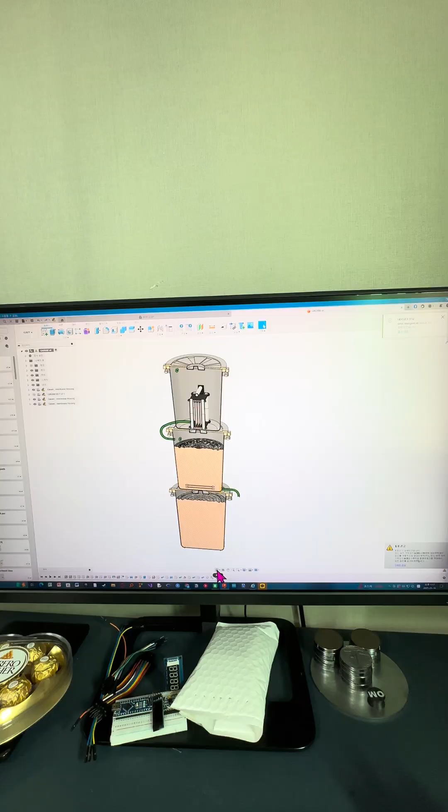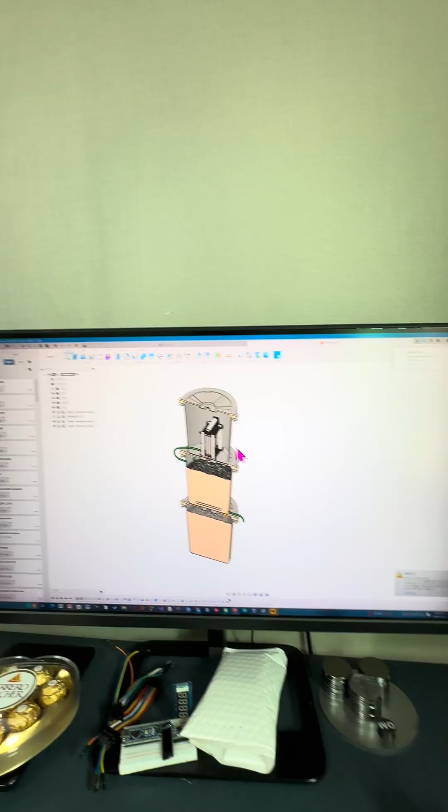This project log isn't one where I go hands-on. It's more of a project log where I explain what flaws our initial purifier had and how this new design works. Okay, so let's start. Our initial purifier had two stages, and now this is the modified CAD design. I sort of lost the initial one, but this upper part remains largely unchanged.

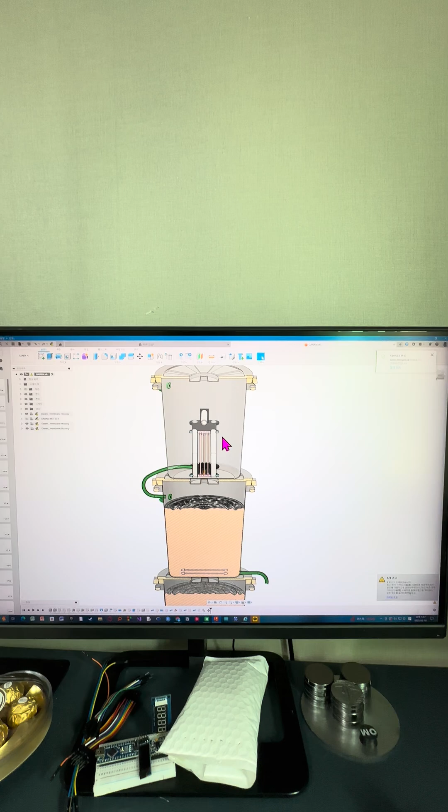This is the ceramic membrane filter with a 0.1 micrometer pore size. It's able to remove most bacteria, actually all bacteria larger than 0.1 micrometers, and that includes E. coli, among other things that can cause several diseases.

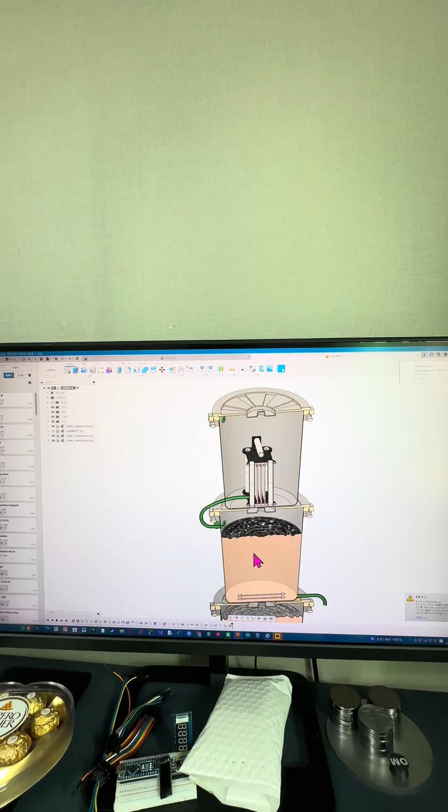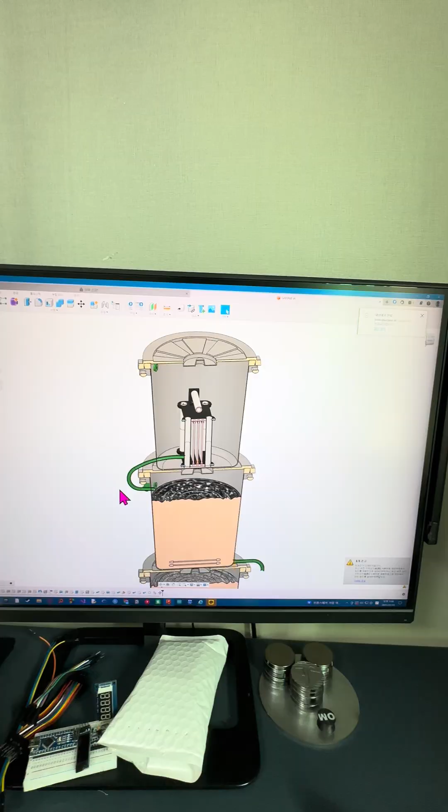So that was our initial design, and then down here, instead of going to this second chamber, our initial design just put a small, not ceramic, but activated carbon chamber filled with activated carbon. In hindsight, that would have never worked, but at the time we thought that much exposure to activated carbon would allow for the removal of heavy metals like arsenic, zinc, and copper.

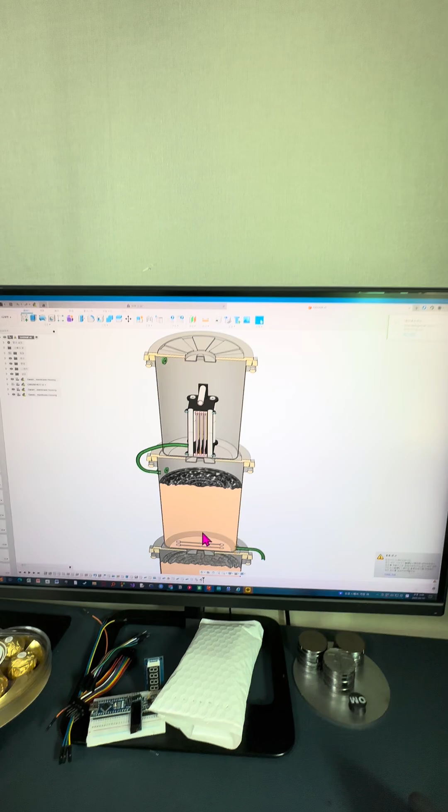Now, this new design - well, before I explain the new design, the problem with the old one was kind of simple. It had three big problems.

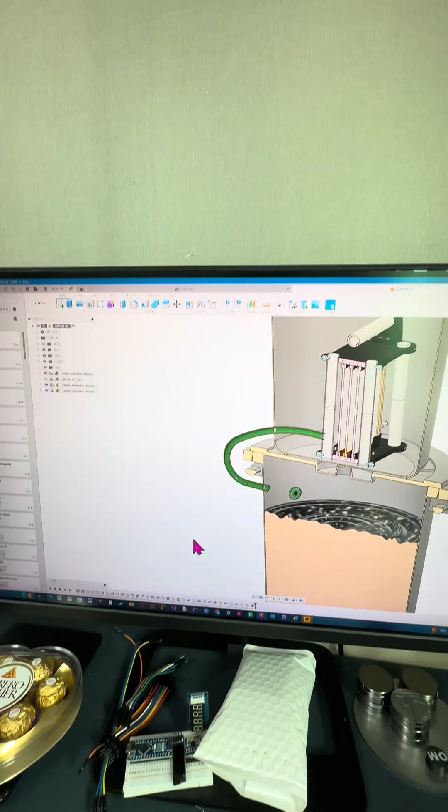Firstly, we checked, and it was not able to remove the heavy metals because when you just put a small chamber here like this, water will just flow through the activated carbon chamber incredibly quickly. By incredibly quickly, I mean like a 10-second exposure time maximum. That really doesn't allow for the activated carbon to remove all the heavy metal particles, and so it was largely ineffective.

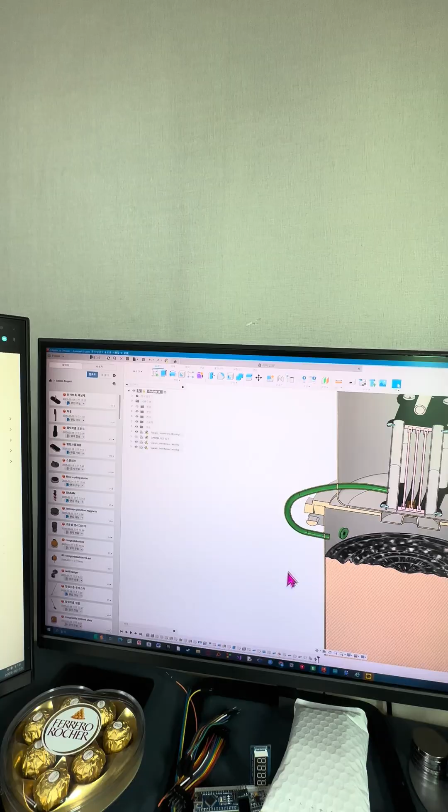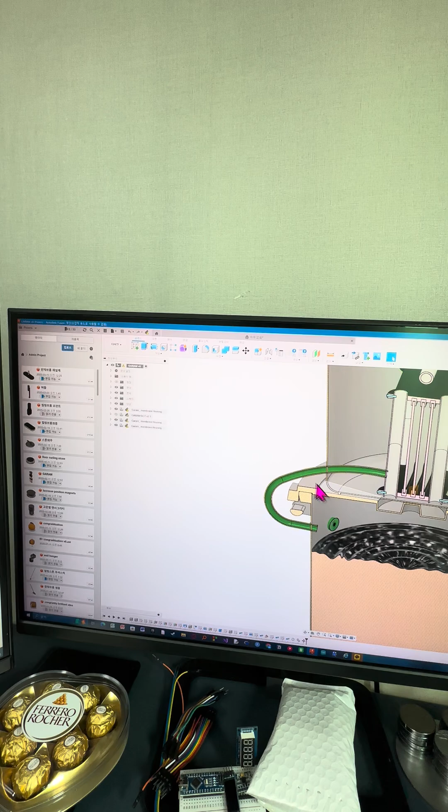The second problem was that this activated carbon chamber had still water inside. Even though this membrane kept flowing, sometimes when you're not trying to drink water, we had a valve here, and you would close the valve, but the water would still be stored in the activated carbon chamber because there's no force pushing the water down.

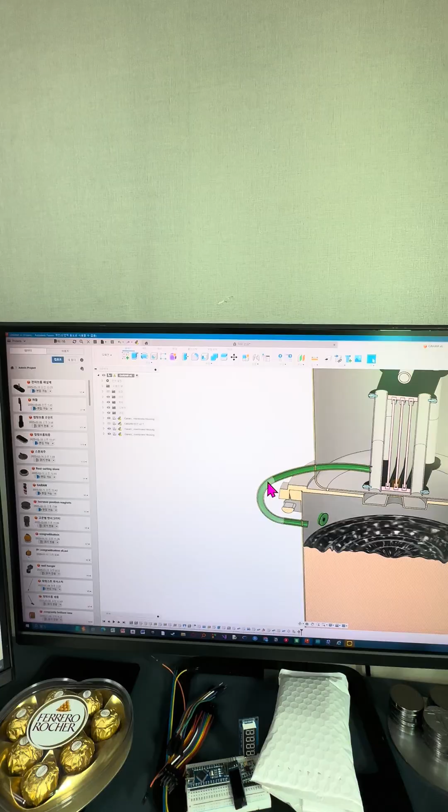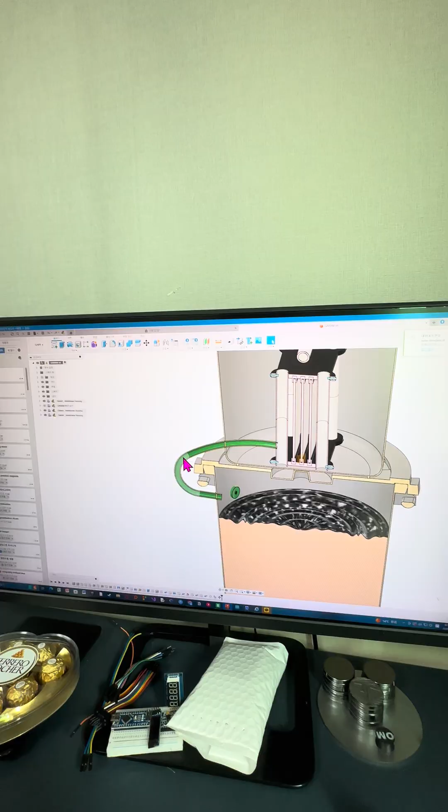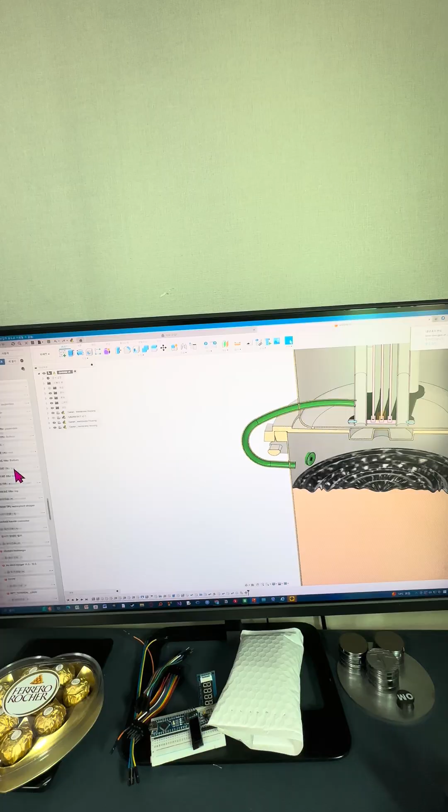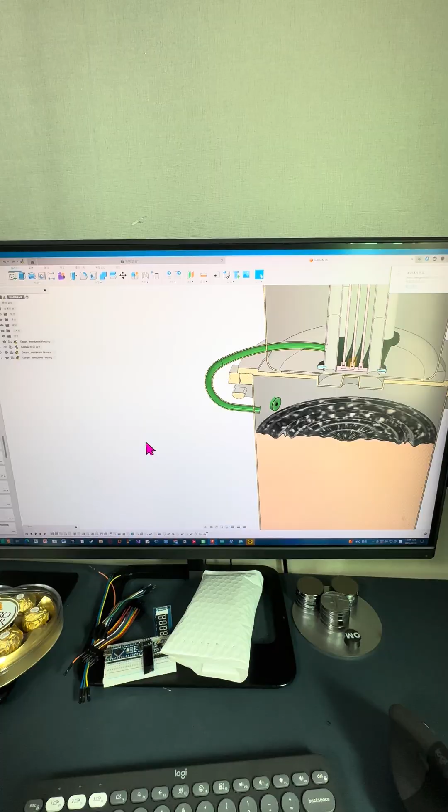So that was the second problem. Now, the third problem was this. The activated carbon chamber - I have the CAD design somewhere down here. There we go. Actually, I have it in three parts, and I'm just too lazy to show it to you. But basically, it needed screws to bolt it down and keep it in place. And then you also needed hexagonal-headed drivers in order to remove the lid and replace the activated carbon. That's obviously not ideal when you're installing a purifier sometimes in the middle of nowhere without those sufficient tools.

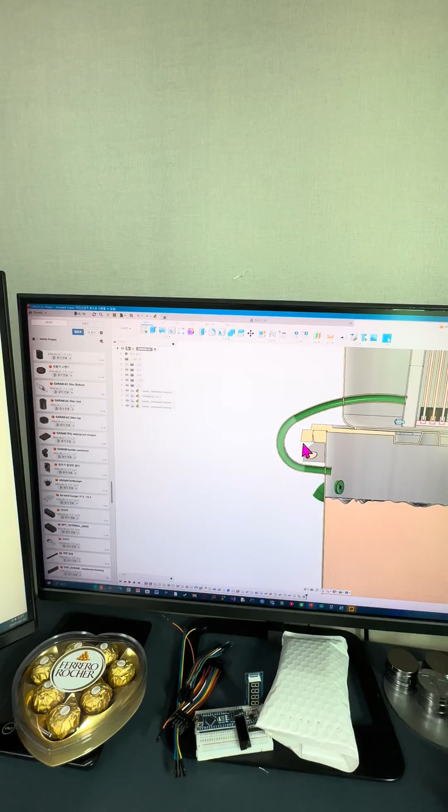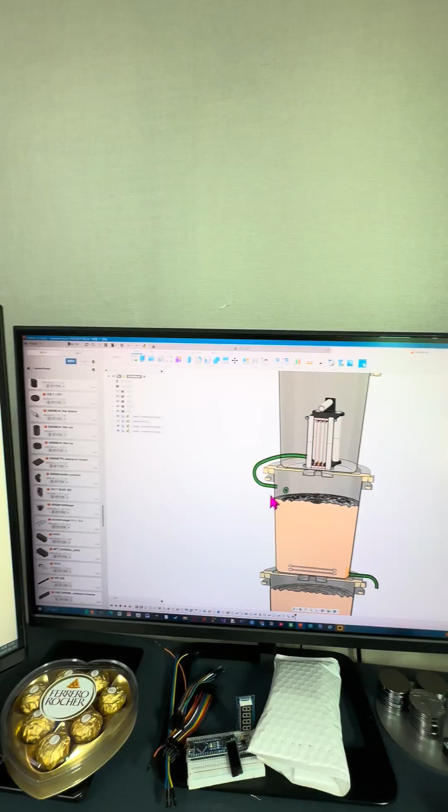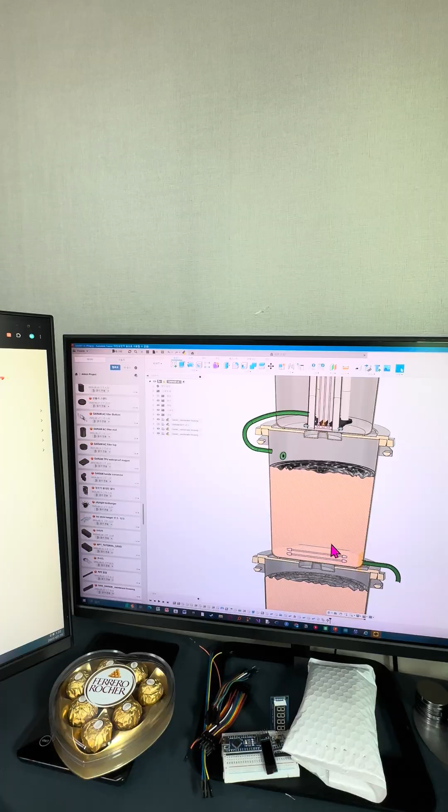So I changed that. Now I'm going to tell you how we addressed all three problems and fixed those problems in our modified design. Firstly, the problem with exposure time: we redesigned the entire activated carbon chamber. So instead of a little chamber to the side here, we now have a dedicated plastic bucket, about a 105-liter capacity bucket, that houses about 20 kilograms of activated carbon and 2 ceramic membrane filters in parallel. I'll explain why this works.

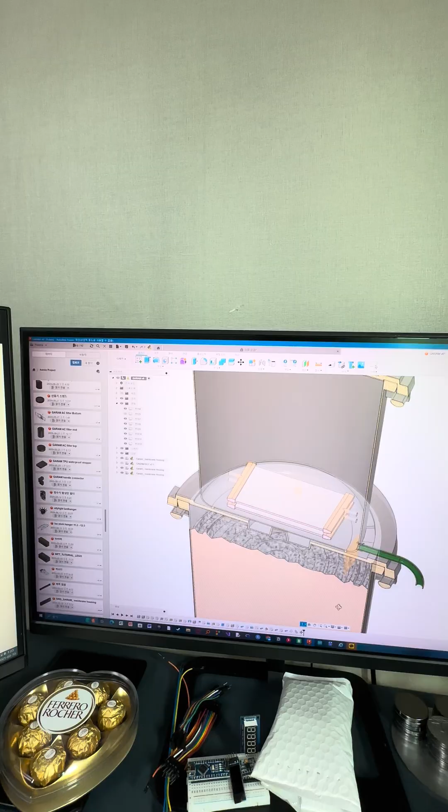Firstly, if the water wants to exit this activated carbon chamber, it needs to go past - can I remove this so you guys can see - yeah, it needs to go past these ceramic membranes. Now, if you know anything about ceramic membranes, you know that they require a lot of gravity-driven pressure in order to push water out.

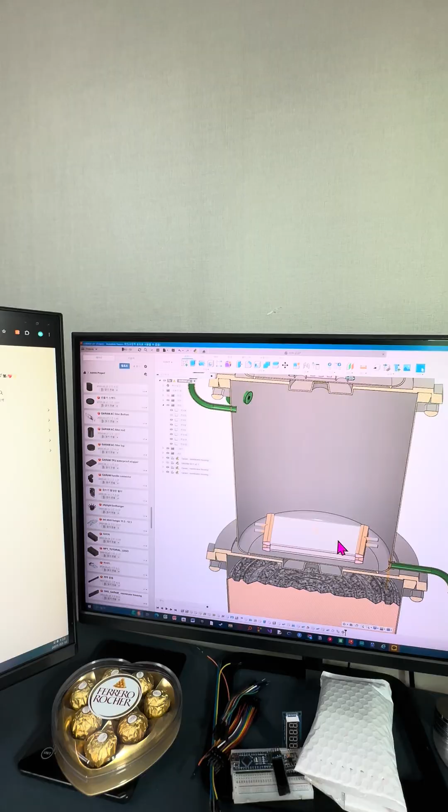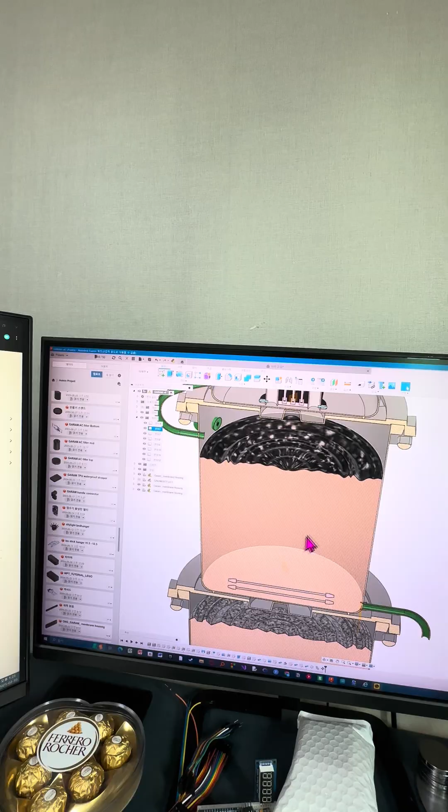And what that enables us to do, and you also know that it's relatively slow compared to just tap water, and that's because it needs to push water out of its small pores. Normally that's a big downside because it makes the whole process a lot slower, but in this case, where we actually need to increase exposure time, it works in our favor because it allows us to increase the exposure time drastically.

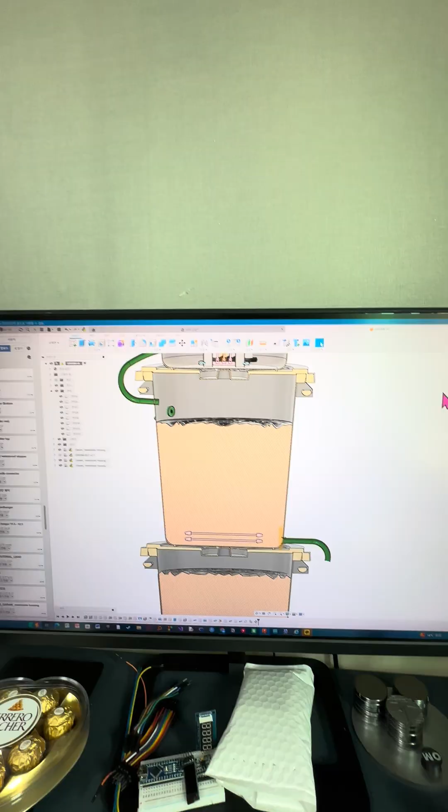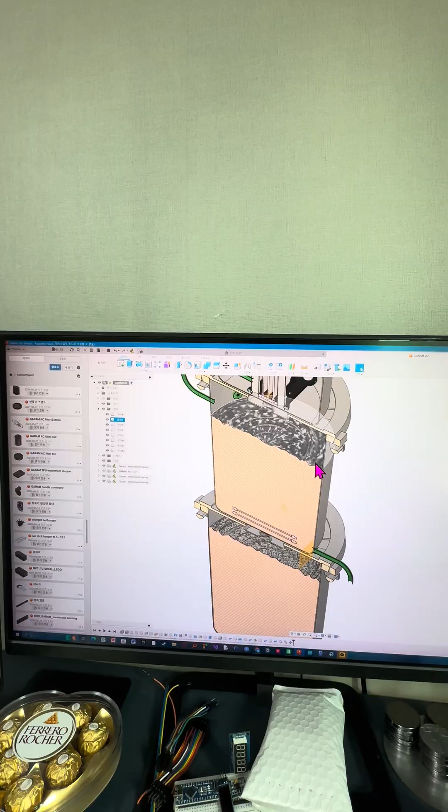We've measured that when you fill this entire tub full of water, about 100 liters when it's filled to the brim, it takes a couple hours for the water to exit. I think that's much more than enough exposure time for the water with the activated carbon. I believe, though we haven't tested it yet, that it will be able to remove those heavy metal particles that we were worried about.

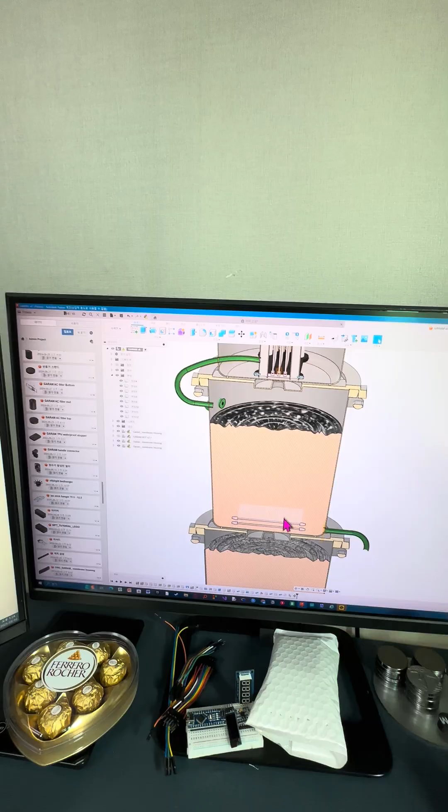So that's problem one solved. Problem two was the bacteria problem, and we also addressed that with this ceramic membrane filter. Any bacteria that can grow in this condition will not be able to permeate through these ceramic membrane filters, because these filters are the exact same that are used up here, as in they are 0.1 micrometer pore size membrane filters, so they're able to block the progression of the bacteria.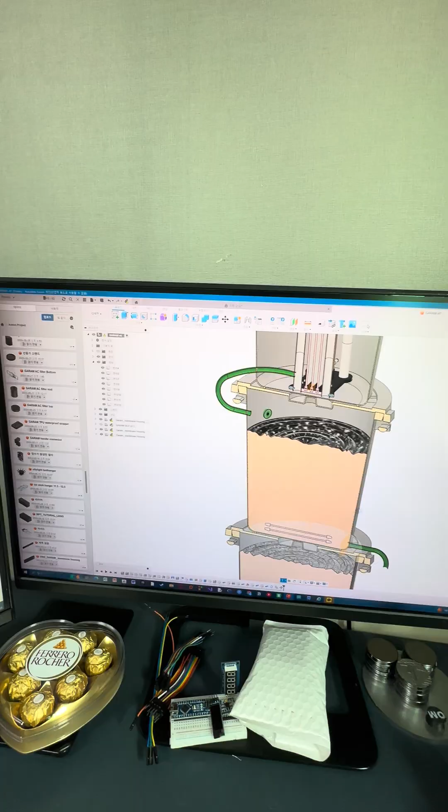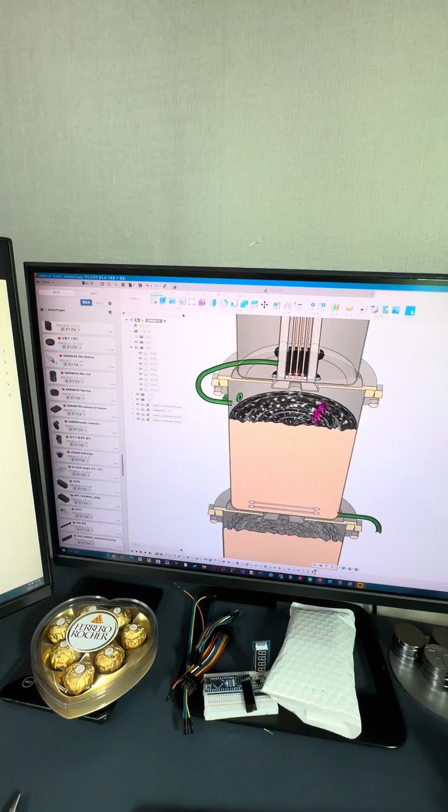Now the third problem was activated carbon removal, or activated carbon refills. The refill process was too complicated, so we fixed that by just making this chamber a plastic bucket. You just pop the lid, and then you dig all of this activated carbon out, and then you replace it with new activated carbon. You don't even have to replace the entire thing.

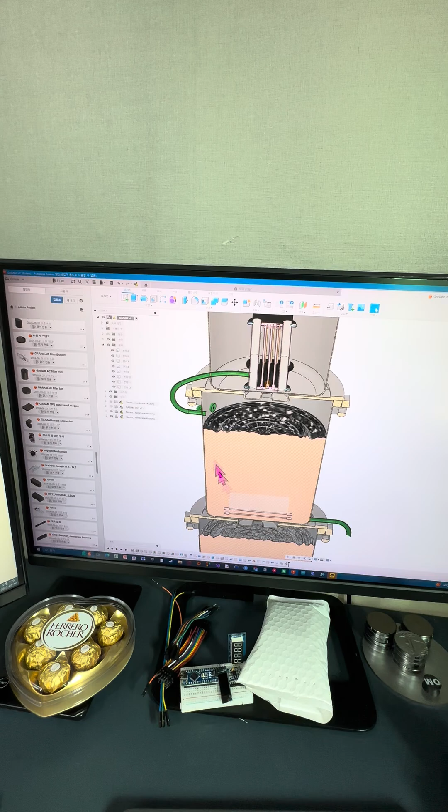It can be tricky to get down here and replace the activated carbon down here. Honestly, all you need to do is replace the bulk of this activated carbon, and we estimate that it will still be able to run and deliver the performance that we hope to get. So that's how we addressed all three problems.

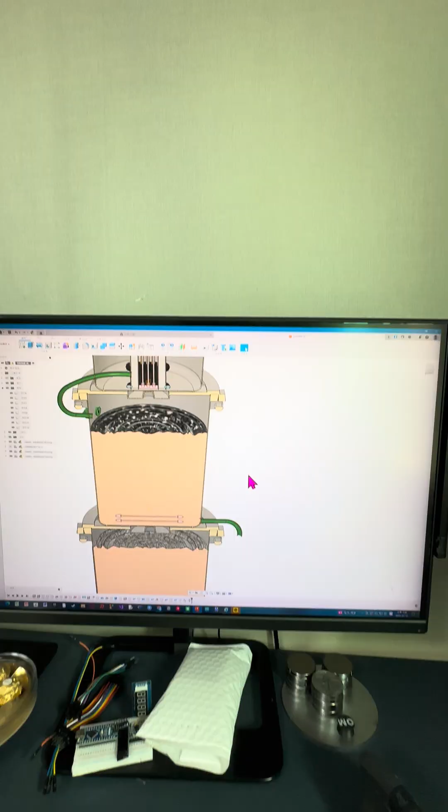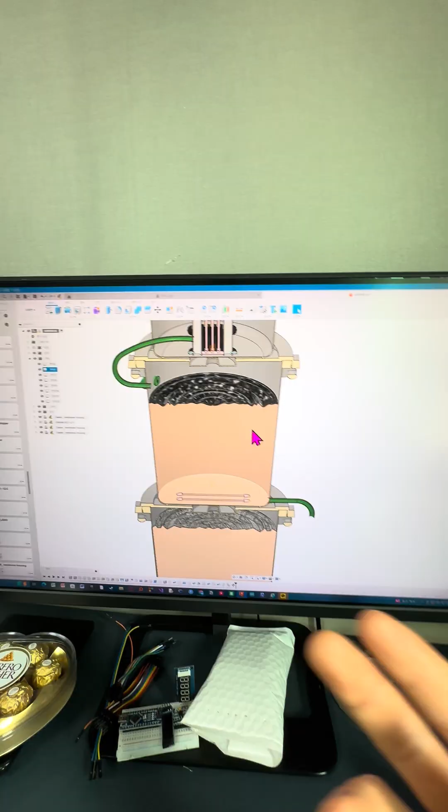Now there's actually a fourth problem that happened during testing when we came back to Korea, and that was the problem of activated carbon microparticles. If you don't know, charcoal really likes to break. It's really, really brittle, and every time you're doing a barbecue and you accidentally touch a coal, that black powder that comes off your hand is actually incredibly small particles of the charcoal itself. So it really likes to break.

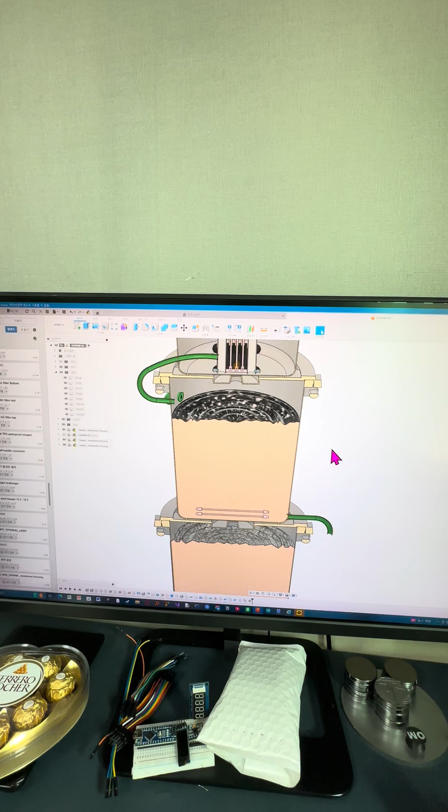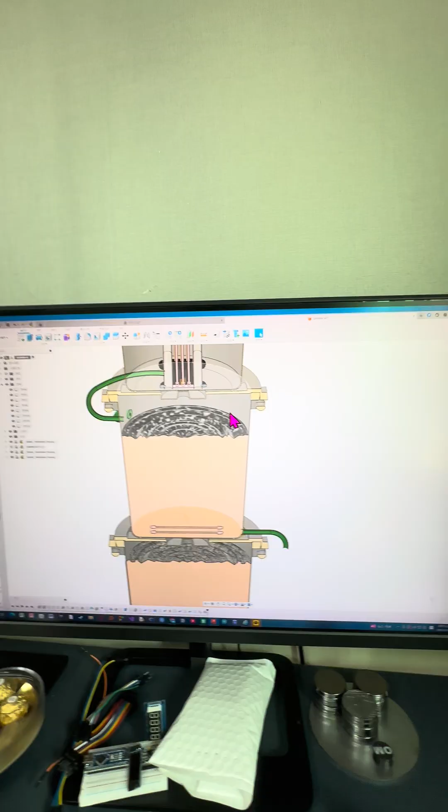It's very abrasive, and because of that, when you pour activated carbon in here, since activated carbon is essentially just charcoal but with a bit of post-processing, it still remains incredibly brittle and abrasive, which means it still breaks easily and generates a ton of powder. The problem with powder is that it's not always visible, and if it's not visible, it means it's incredibly small, somewhere in the ballpark of 1 nanometer to 10 nanometers. That is scarily small.

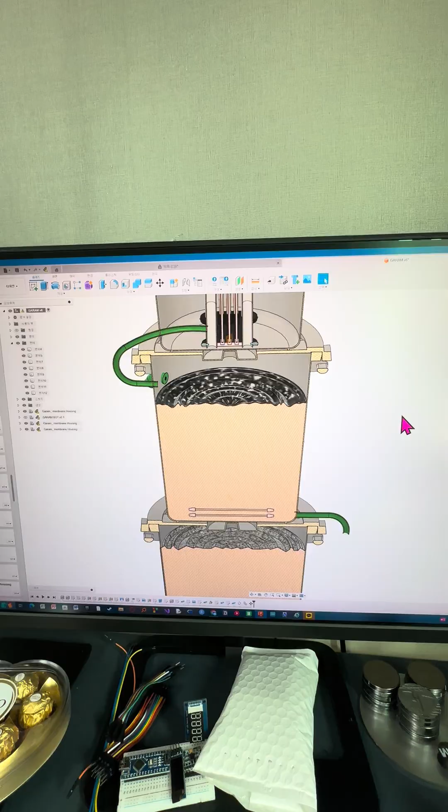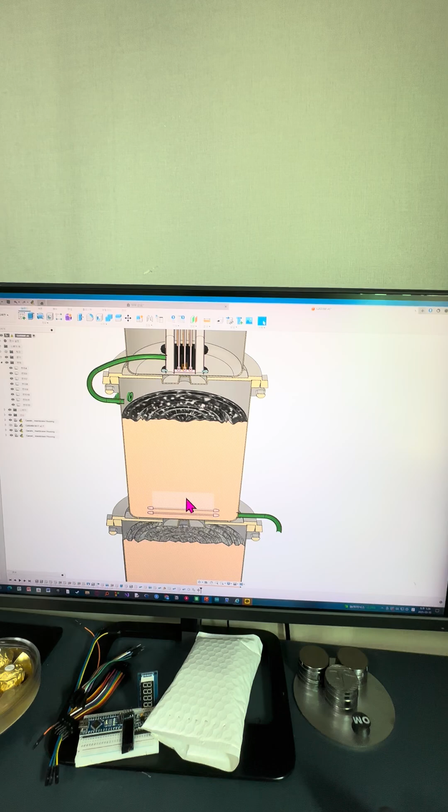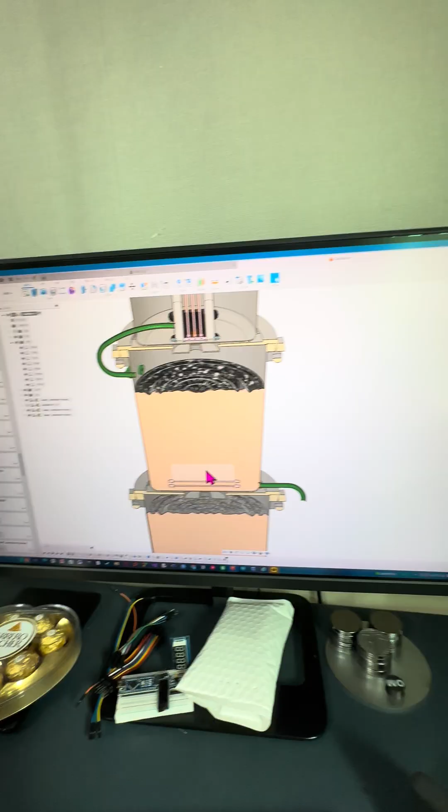And those are able to permeate through the ceramic membrane filter, and that was a big problem. Actually, the initial problem was that we didn't have this sort of permeation device here, so not only did the nanometer particles flow out, but visible micro or millimeter particles were also able to exit and get into the end product. That's terrible, you don't want to drink water that visibly has debris in it. So that was a terrible problem, and we remediated it by placing these ceramic membrane filters here, which are able to effectively block out any particle above 0.1 micrometer in pore size.

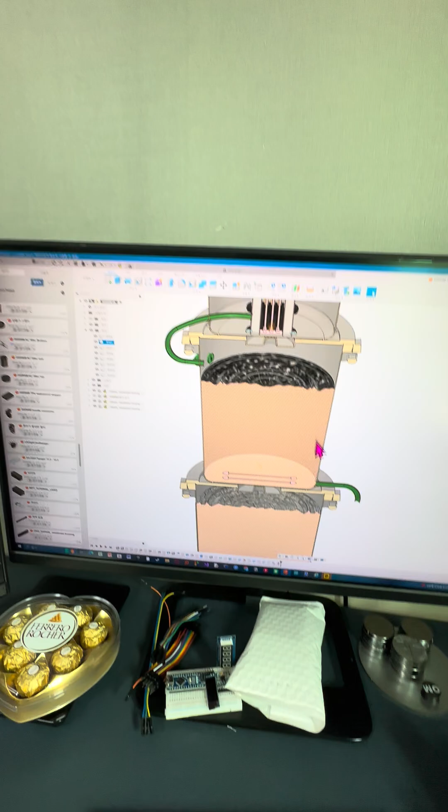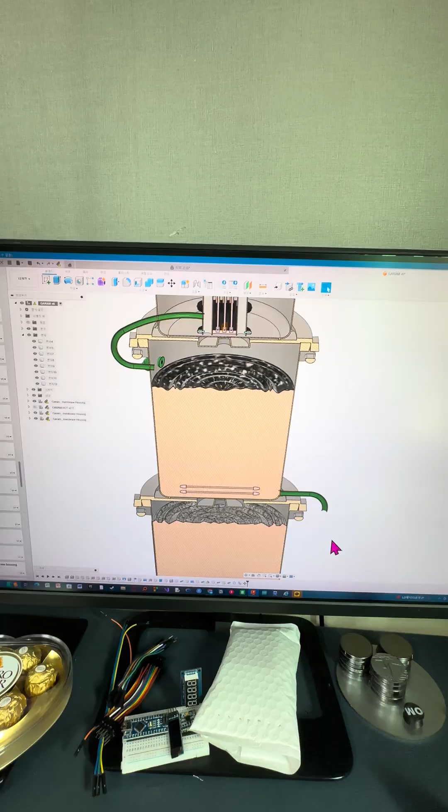We did testing again somewhere in the vicinity of February, in the second week, and did a couple of tests. The problem was that the super small nanometer powder particles of the activated carbon were still able to permeate through. The end product water was still grayish. We couldn't see any particles, but when we held it up to the light and checked it with a spectrometer, we found it was still not 100% clear water.

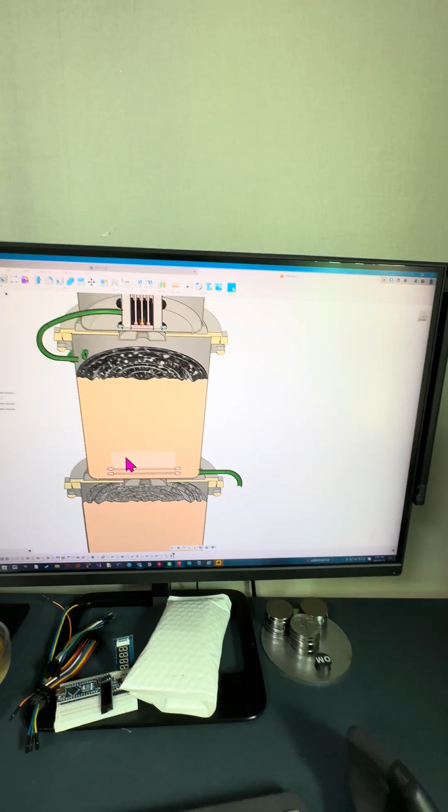That had me worried, because if we're not able to remove activated carbon particles with something as sophisticated as a ceramic membrane, that is very worrisome, especially because the other solutions for particle removal are very limited and also very costly. So I was worried a bit.

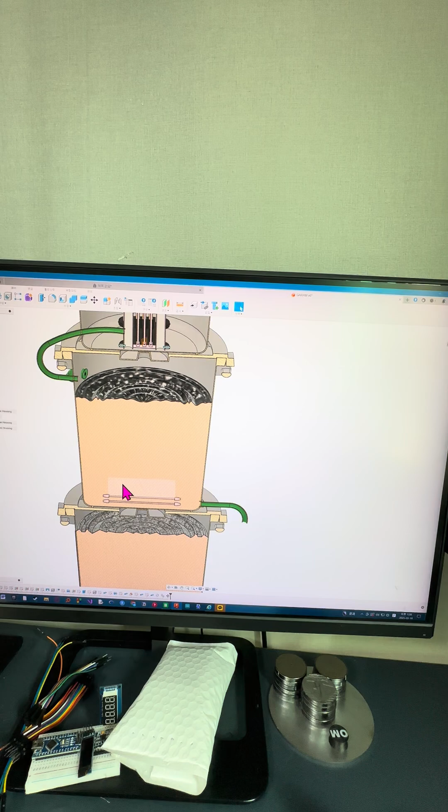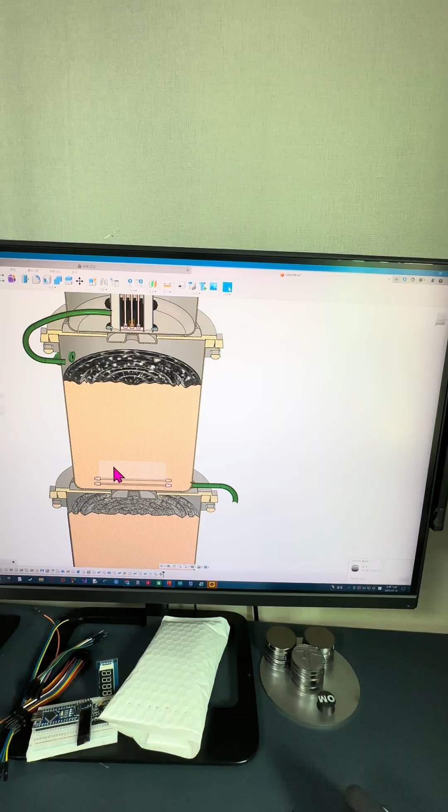Then I had this other event, sort of a forum by our club, though it wasn't even really a forum. It was just a presentation for our parents to see what we did this year on our expedition to Laos. One of my friends made a high quality documentary style video about our expedition last year, and in that video, it was actually me speaking, past me, somewhere in August.

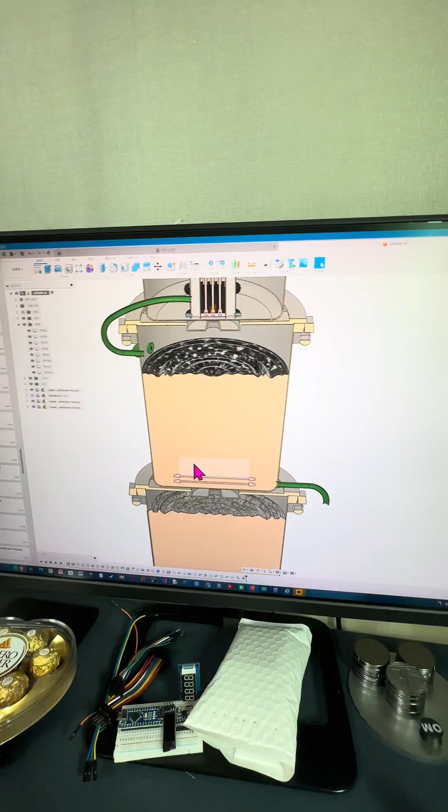In the video, he mentions that you have to leave the filter flowing for a couple of hours to let all the particles out. That just sort of hit me. I was like, right, he's right.

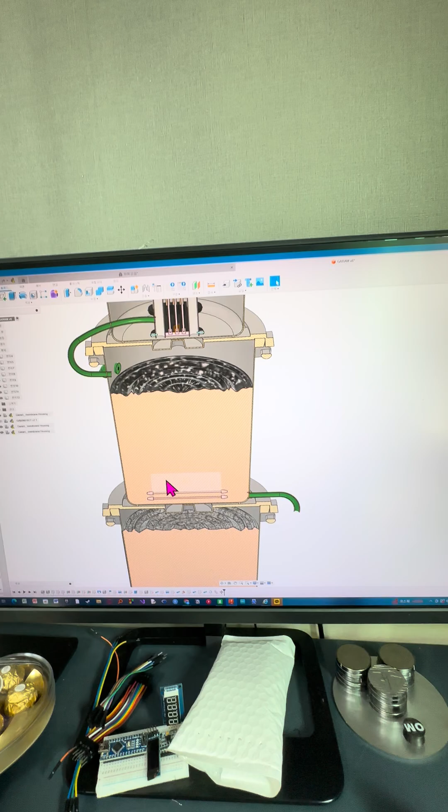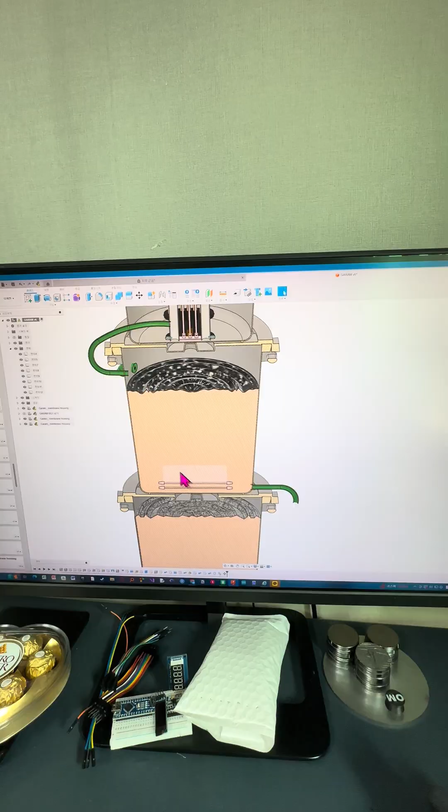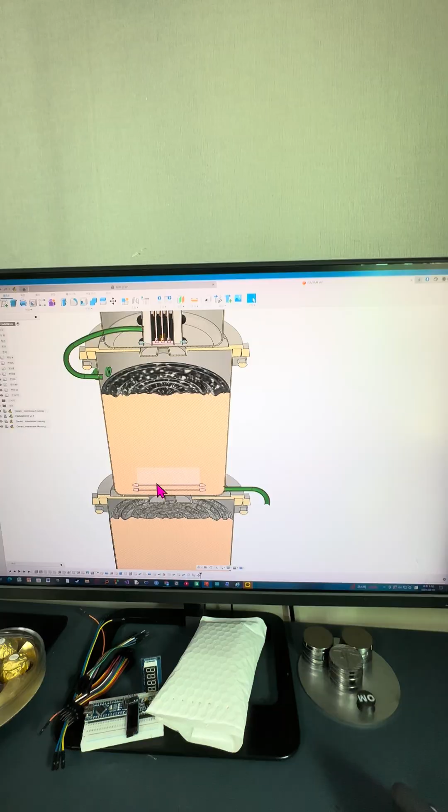Particles are always a problem when you use activated carbon filters. Not even the most sophisticated brands like German Brita are able to completely remove activated carbon particles. Instead, what they do is put the best permeation device they can find, like membranes or stacks, and then write in the manual to make the consumer let the water flow. So instead of making a truly sophisticated and expensive system to remove all those activated carbon particles initially, what those companies instead do is write in their manual:

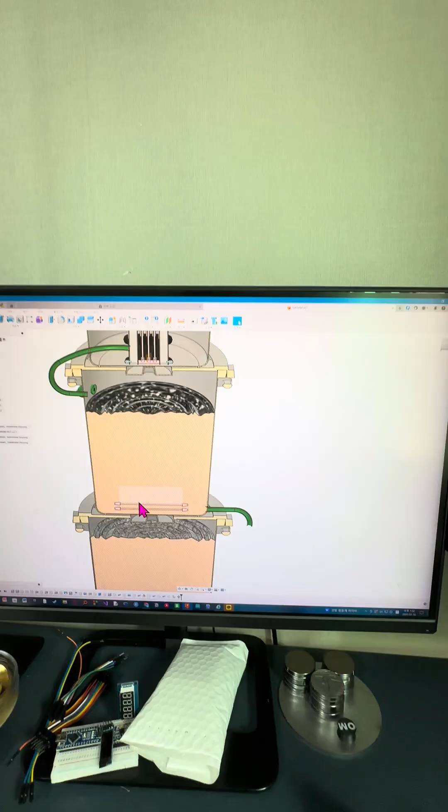During the first one to two hours of activation, do not drink the water. Just throw it out, leave the purifier running for about an hour to an hour and a half, and that will remove all the initial particles. That was the exact solution to this problem.

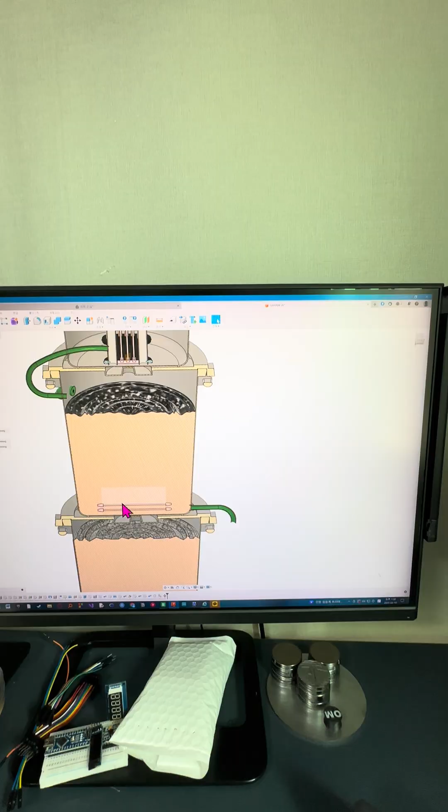We just put the activated carbon in, put water in, activated it, activated the purifier, and let it flow for about a couple hours, and it worked. No particles, super clear water. We have not yet put it through a spectrometer, so I can't say for certain at this point, but to the naked eye, with a microscope, and looking through the water with a light source, subjectively, it was incredibly clear.

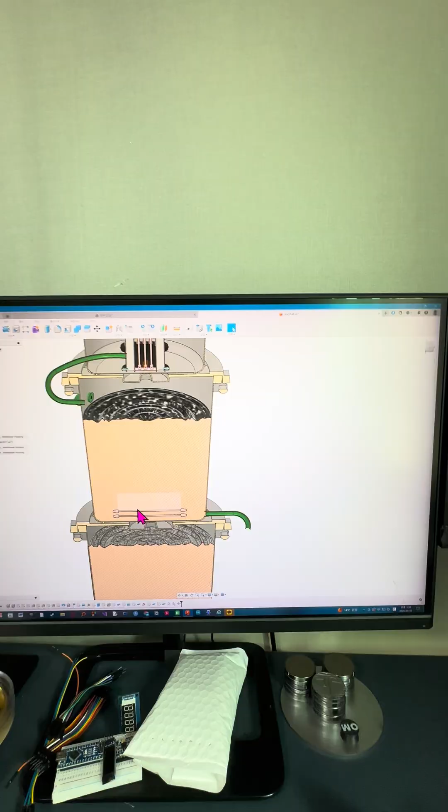So I have some high hopes for the results. I think we can initiate the experiment again—well, not we, but my fellow colleagues at Ongdalsum can initiate it sometime this week or next week. It is a Monday. But yeah, that is about it.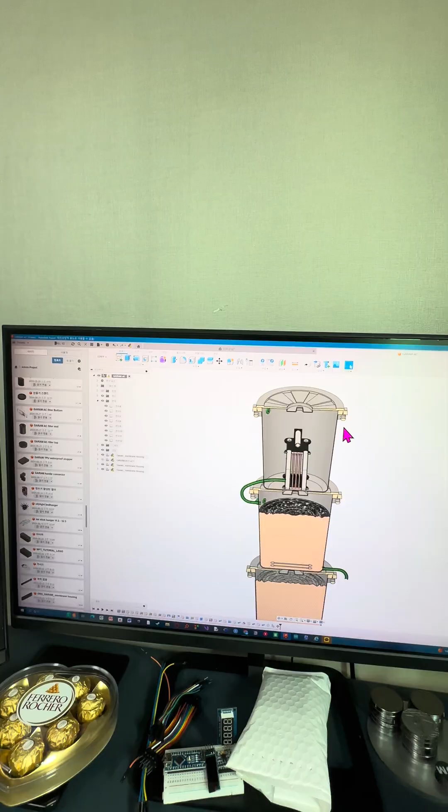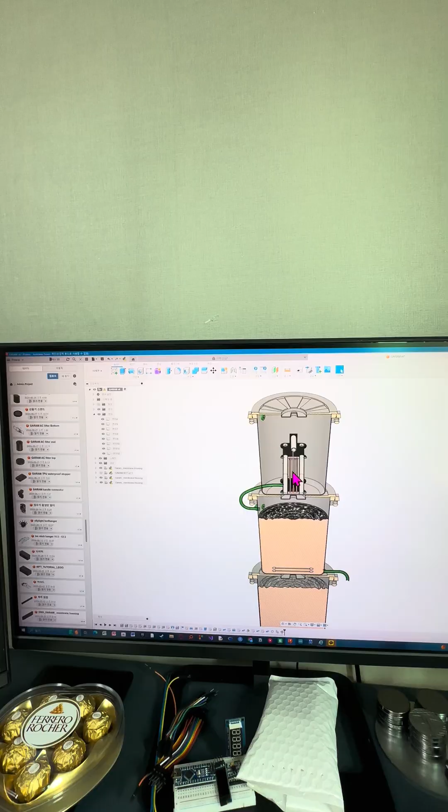So let me just recap the structure of this purifier. This is the first chamber. It houses the ceramic membrane, which removes bacteria. Water goes into here initially, and once it reaches the ceramic membrane, it gets pushed through the pores of the membrane, removing the bacteria. Then once the bacteria is removed, it comes down through this pipe and into the second chamber, which is full of activated carbon.

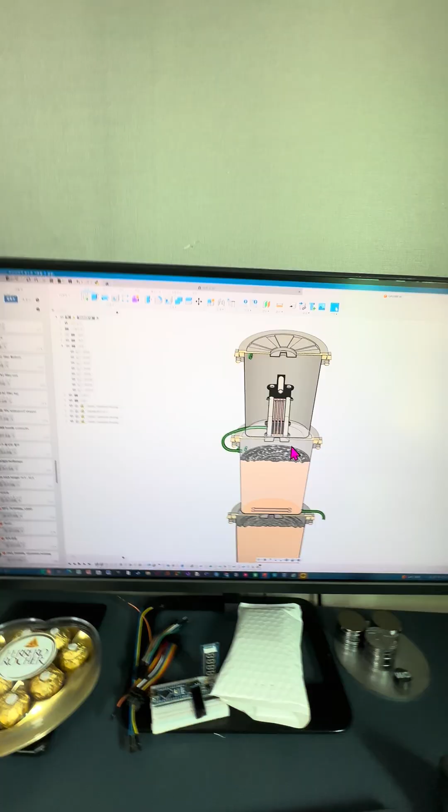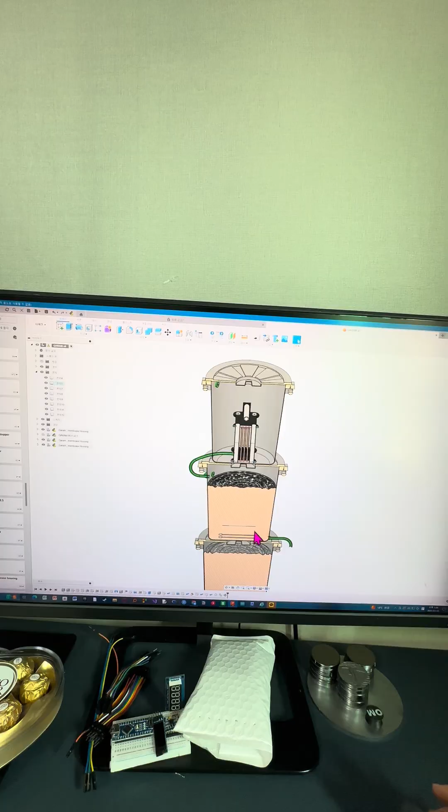Here, the water is stored until it's able to flow out through the ceramic membrane filter down here. That gives the activated carbon and water enough time together, enough exposure, to remove the heavy metals. Once the heavy metals are removed, it goes through this ceramic membrane filter again to remove any bacteria that might have been created during this process. Once it permeates through the ceramic membrane, we get our end result, which is pure clear water.

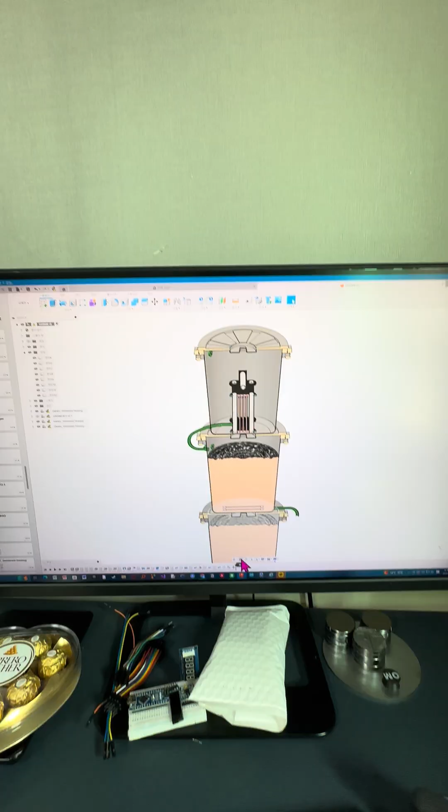I will test it. I will ICP it. I will NMR it. So, yeah, anyway, thanks for listening to me. I do have a runny nose, but that's about it for this project log, and I'll see you next time. Bye-bye.